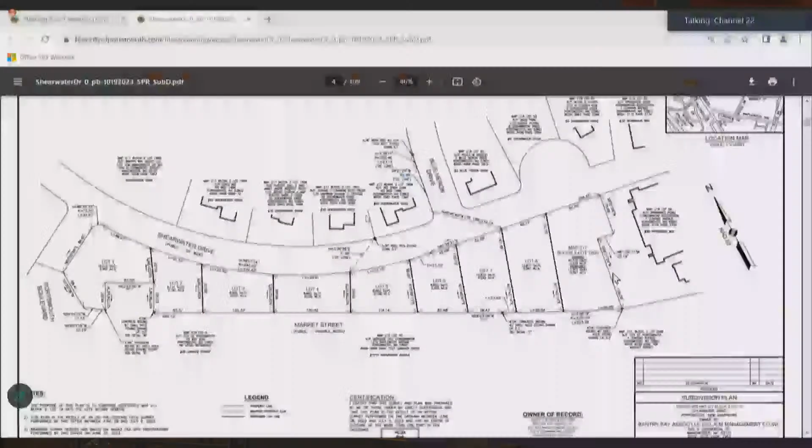So as just read into the record, we're here to request subdivision and site review approvals for an existing lot along Shearwater Drive. So the existing lot is currently a 2.23 acre lot that formerly had 5 duplexes, a single 4-unit building, and a single 6-unit building that were located on that lot. Those buildings had a variety of driveways and parking areas as well off of Shearwater.

The proposed project is to subdivide that single 2.23 acre lot into 9 single-family residential lots. All of the proposed 9 lots conform with all required zoning regulations, so we don't need any relief for any of the lots. On the subdivision application, we are also requesting a waiver from section 9.2 requiring a maintenance bond for maintenance of roadways, as we're not proposing to build a new roadway as part of this project. That section is not really applicable to this project.

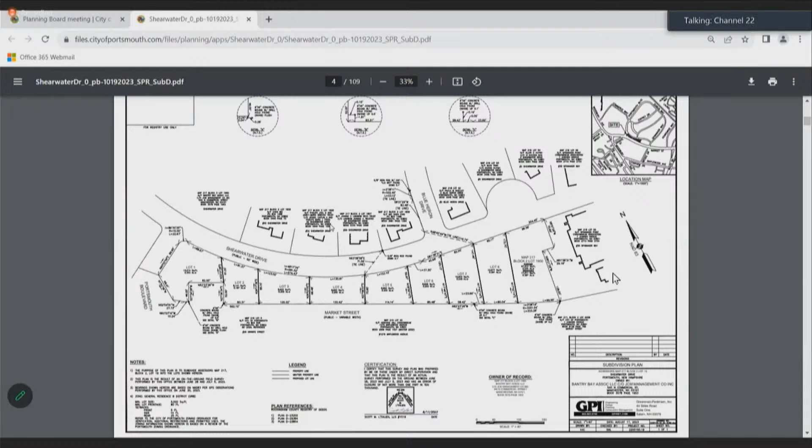If you could go a couple pages ahead. So the buildings that were previously located on this piece of land were previously demoed, and there's currently a fence around the site as the foundations are still there, as well as the driveways and parking areas. So the site plan shown here is, again, to construct 9 single-family homes. This site plan has a table at the top middle there that has a list of a variety of different house types that could all potentially be on these lots. Those spec sheets for those houses were also included in the package.

Basically, the idea would be after this gets subdivided, the lots will be sold individually, and whoever purchases those lots will have the ability to choose from that list of homes. There are certain homes that don't fit on certain lots, and we've already looked at that. So the idea would be whatever footprint was selected will meet all of the zoning requirements.

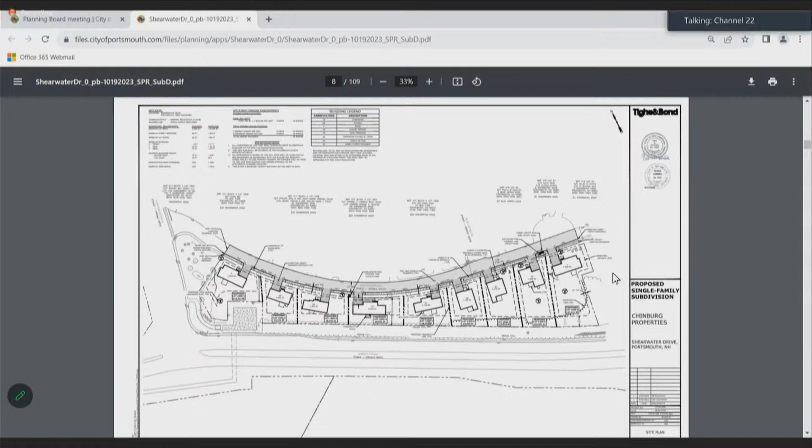On the site plan side, we're also going to be mill and overlaying the entire length of Shearwater Drive along the frontage, as well as constructing or reconstructing the sidewalk that is currently there with a new concrete sidewalk. The sidewalk will follow the alignment of the existing sidewalk. There had been some discussion in TAC about moving that sidewalk off the curb line, so there was a grass strip between the curb and the sidewalk. We've done that here where we can, but there were certain areas where we left it along the curb line in order to not have to cut down some of the mature street trees that currently exist on the back side of the sidewalk. So the sidewalk generally follows the alignment that is currently there today.

If you could go to the next sheet. So on the grading plan, generally we're just regrading the site to match existing grades. This proposed plan does reduce the total impervious surface on the lot, and to determine that, we selected the largest footprint that would fit on each lot to make that calculation. The calculation is actually in the upper left-hand corner of this page. So the worst-case scenario is a reduction of about 500 square feet of impervious surface. Depending on which houses go on which lots, it could be slightly lower than that.

As part of this, we are replacing some existing drainage pipes in Shearwater Drive that were identified by DPW that were in need of replacement. So we will be replacing the pipe that crosses Blue Heron Drive, and then also the run that goes across Shearwater in that same location with new HDPE pipes.

Additionally, there are a number of pipes that currently connect from this lot through to Market Street. Between Market Street and this lot, there's a rather large berm. I think it's about 10 feet high from the Market Street side, and then from the Shearwater side, it's about 4 to 6 feet tall. Heavily vegetated. It's a great screen between Shearwater Drive, these lots, and Market Street. Blocks traffic noise, and again, obviously mature landscaping.

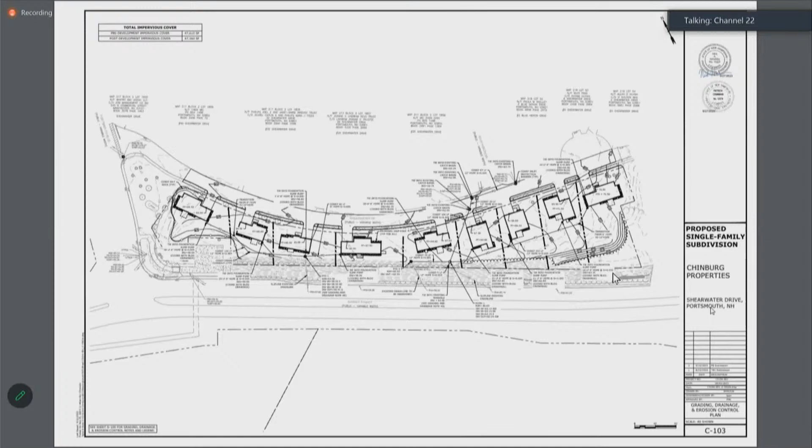If you go to the next sheet, utilities pretty straightforward. There'll be new service connections for each of these lots. In Shearwater Drive on the right side of this plan, so the eastern sort of half, 4 or 5 lots, we will be replacing the existing sewer main that's in Shearwater Drive. It's an existing clay pipe, and we'll be replacing that with a PVC along our frontage.

And then I guess one last thing to touch on, the landscaping. Generally the plan for landscaping is, one, protect and preserve the mature street trees where we can. There are a few that need to come down based on driveway locations, so we will be replacing those street trees that we're removing with new trees along the street. And then the 2 lots on the right, we're proposing to put a couple of trees in the backyards there. We have to do some clearing for grading purposes in the rear there.

The rest of the landscaping is basically we're leaving a blank canvas for whoever the future owners of these lots are to landscape their property as they see fit. So that's why the landscape plan's a little sparse, other than replacing street trees and then a couple trees in the rear of those 2 right lots. That's about it. Take any questions.

And is there any concern for noise volume from the roadway? That's the main reason why we didn't want to cut into that berm, because if we did, we could obviously rebuild it, but then you lose all the vegetation that's on top of it. So from the side of these houses, there's about a 5-foot hill behind, with pretty tall trees, pretty thickly vegetated along the top of that. So that's about all you're going to get.

I live right along this road, right down the street, and guys with modified exhaust, you hear them, but 95% of the time, it's not bad. Thank you.

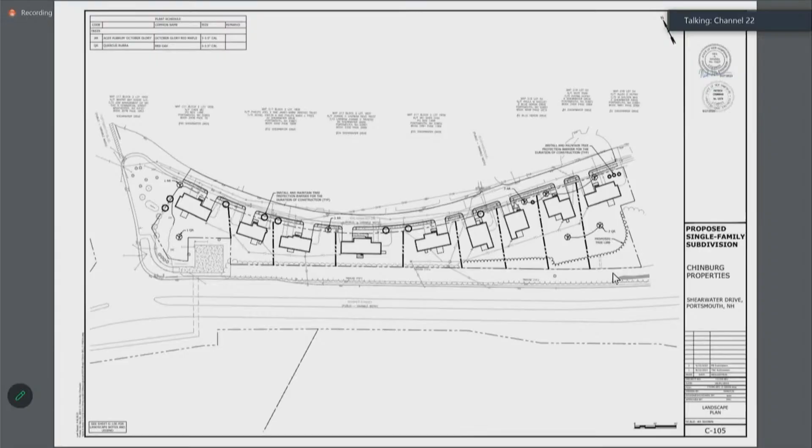Yes, Corey. Quick question. Did TAC raise any concerns about having the sump pumps of each residence tied into the drainage system proposed? They didn't. They did not. Okay.

Thank you. Andrew. There was recently a development off of Cut Street that Chinburg had done. That was 4 homes in a small cul-de-sac, and it abutted Market Street as well. I believe they did a fence of some variety, and I think there was some public access, so that could have changed the consideration. But was there a consideration to do a fence as well as some tree planting?

There wasn't that I'm aware of, at least presented towards me. And again, I think the main reason for that is we already have this rather large berm separating. And I mean, a homeowner, when they buy one of these, could put up a fence behind their section of property. But I think that berm is pretty substantial and heavily vegetated. So, okay. I don't know how much extra you're going to get from a fence. Any other questions?

I have to interrupt. I made a mistake. I was interrupted at the beginning, threw my thinking off. Mr. Simonis had asked you to sit for Ms. Magala, who's not here this evening, and Mr. Bowen for Councilor Moreau. So because I didn't do that, could we have a motion to reaffirm everything that we've done so far? So moved. Second. Any discussion? All those in favor? Aye. Opposed? Thank you.

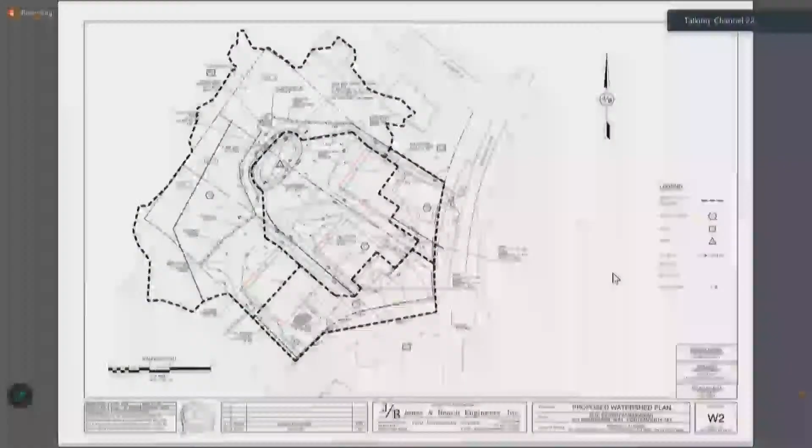They started looking at the design of the site. It was a 3-lot subdivision, and it had a fairly substantial amount of infrastructure required for the drainage and the grading of the site. On the originally approved plans, there's a large retaining wall along the back of the houses, and prior to that retaining wall, there were some underground StormTech drainage systems for roof water, which are very common in commercial developments, not the most common in house lot development with residential owners having to maintain these,

as well as a large retaining wall that crossed over property lines, which would have involved neighbors if there were ever issues down the road. So Green and Company asked us to take a look at the drainage, see what we could do to simplify it, and still keep the layout. There's no changes to the layout of the lot lines or any of those approvals that this board granted.

But we did make one significant change in that we eliminated the retaining wall behind the homes, and we added a rain garden in between two of the rear lots here. The rain garden's just a grassed area, a grass depression. We also dug test pits on the property to verify the soils. We have a device called an amoozemeter, which measures soil permeability. We did permeability tests on the soils to determine if we could infiltrate, and the soils in the rear of the lot are actually pretty decent.

So we did a drainage report with the results from the amoozemeter, the test pits and the soils that we found on site, and designed a rain garden that satisfies the requirement that we have no off-site runoff or a reduced amount of runoff, and really simplifies the design. There's no more retaining wall, there's no more below-grade stormwater systems that have to be maintained by these residential owners. And those are really the only changes we made to the plan.

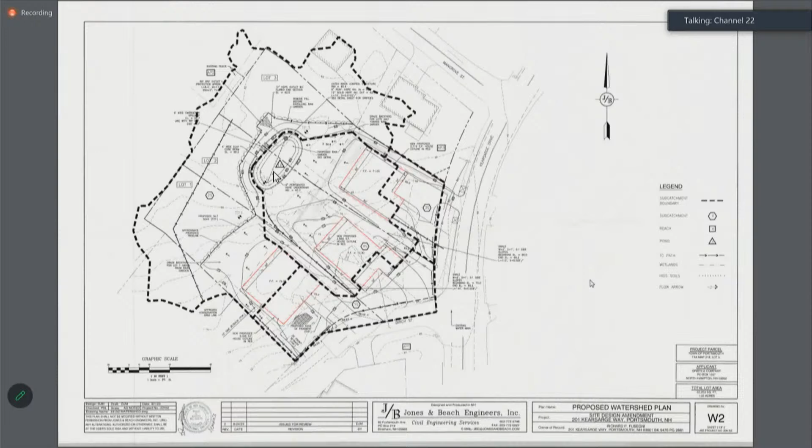So this would be an amended subdivision plan. And I think it's an improvement just to simplify a residential neighborhood area for the stormwater that they will have to maintain, but it's not going to be nearly as difficult as a below-grade StormTech system with overflows. And that's all. Any questions for the applicant?

So you state that, I'm just trying to get my head wrapped around this a little bit. So you're stating that there's obviously maintenance that has to occur as part of this, and the rain garden is split between two properties. You have the overflow on one property, the emergency spillway is split between two properties, but yet we're removing the condition for having a maintenance agreement between the properties? I think there'll still be the requirement for a maintenance agreement. It'll be a much less involved maintenance agreement.

A rain garden does have maintenance. It's very minor. It's basically mowing the lawn. Yeah. Making sure it's draining. If there's ever a situation where it's not infiltrating and operating properly, then they'd have to get together and do something. But it's much simpler than repairing a retaining wall that's going across lot lines, if you ever have an abutter that doesn't want to maintain that wall. There's really a lot less maintenance with a rain garden than you may believe, than any other device, really.

For future possible improvements on that lot, have you sized the rain garden based on the footprints you've shown, or have you sized it a little bit bigger? We increased the footprints to those red outlined footprints, and then we sized the rain garden based on those footprints, to be more typical of what Green and Company builds for houses. So future improvements like an additional detached garage or accessory dwelling unit would not be allowed with this drainage design? I think it'd have to be revisited, but there's also not a lot of room for those structures. The conservation area does allow for the construction of a shed if needed, but that's a fairly minor sized item that would end up in the back.

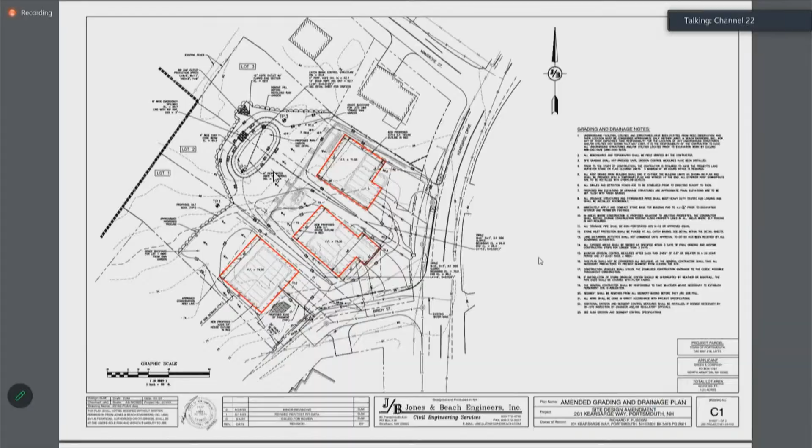It's always tricky with expansions of buildings, if they're revisited by drainage or not. So since the prior subdivision plan hasn't been recorded, you are comfortable just putting some notes on it for a new subdivision plan to be recorded, reflecting the drainage easement? Is that okay? I mean, that's up to the board.

At some point, we'll have to pull together our plans and make one set for the city to sign and record and keep on record between the two engineers. Well, will you be doing it, or will somebody else be doing it? Do you know? I think it would end up, Ambit Engineering did all the survey work, all the layout of the lots, and I think it would end up being on their plan for the easements, and our plans may be assimilated into the set for the stormwater portion, is how I'm picturing it. And then we'd end up with one set with both of us in it.

Why don't you help us out and make a proposal for what you'd like to do and see if it works? I can come up with ideas, but you've got some pretty sophisticated clients, so if the proposal is for you to finish the drainage, which you've pretty much done, and for Ambit to do a revised subdivision plan reflecting these notes, maybe we should know that. Yeah, I want to check that with them. I feel better if we have the plan to look at. Approval conditioned on the new plan being submitted. Yeah.

So as you explained, we're looking to remove the existing deck, which is in rough shape. Part of it is held up by a car jack. And so there is some wood damage on the house. It's structurally concerning, so we're trying to address that as soon as possible. And we're going to replace it with a patio because we feel like that's a better fit for the wetland area.

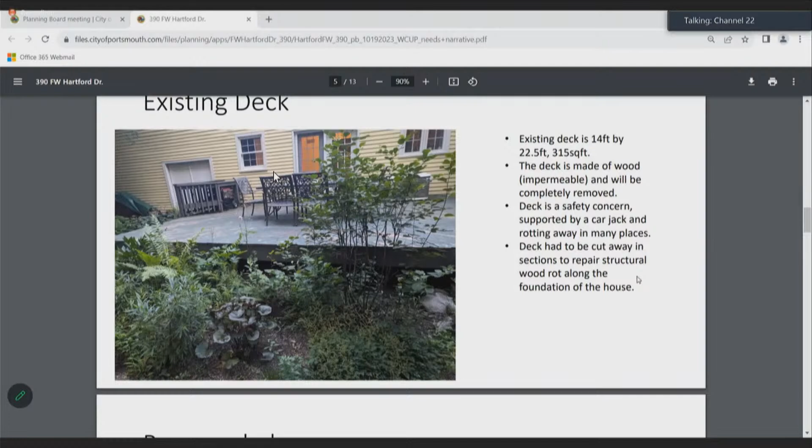I did include adding a rain garden where the sump pump comes out, and we're going to add gutters as well. But there's some additional rot on the trim that needs to be adjusted before we can add the gutters. That's also going to feed into the rain garden, which is over here on the right-hand side. And then we're expanding the garden that's already there a bit. There are a lot of native plants already. The previous owners had a lot of great ferns, so we're just going to extend that.

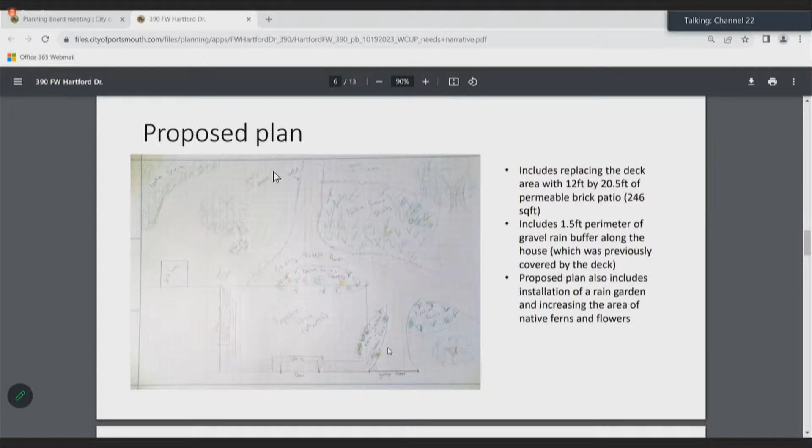Thank you. Any questions for the applicant? I appreciate the drawing. Thanks. No questions? I'll open the public hearing. Public hearing's open. Anybody who wishes to speak to, for, or against this application? Still nobody on Zoom. I'll close the public hearing. I'll make a motion we vote to find that the conditional use permit application meets the criteria set forth in section 10.1017.50 and adopt the findings of fact as presented. Second? Second. Any discussion? All those in favor?

Aye. Opposed? I'll make a motion we vote to grant the wetland conditional use permit with the following conditions, 2.1 as outlined in the staff memorandum. Second? Any discussion? I think the homeowner has actually done a great job based on the one photo in the packet of what the backyard already looks like. It seems like there's a lot of native plantings already back there, and not seeing grass I think is great for this particular location, and I think what they have proposed is fantastic.

And it's also a safety issue. Yeah. Any other discussion? All those in favor? Aye. Opposed? Thank you very much.